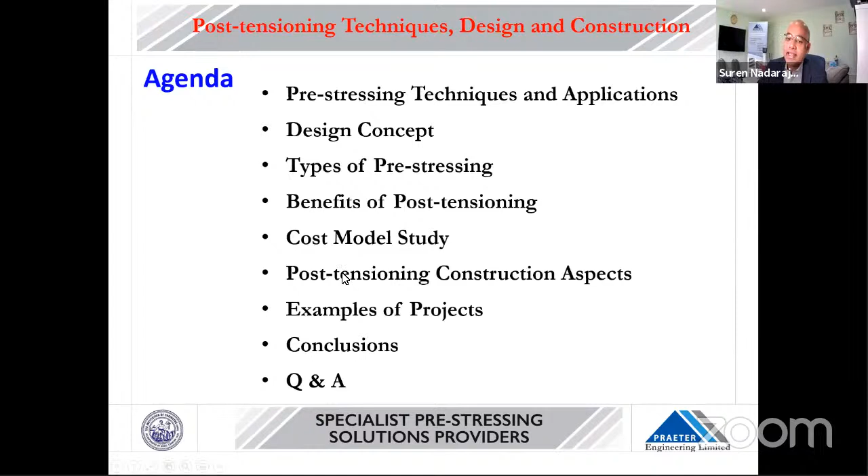The agenda for today is, first the techniques and applications, then a little bit of design concept. I would like to briefly touch on it, not really go into detail, and then types of pre-stressing. What are the benefits? We are going to mainly concentrate on post-tensioning, because that is the one used around the world. More than 80% of projects use post-tensioning. Then a little bit of a cost model study against the other available solutions, where post-tensioning stands. And then some of the construction aspects and the examples, and at the end the Q&A with the conclusion.

So the pre-stressing technology is actually a simple mechanism which we use in day-to-day activities, but we don't really realize that's what we are applying. When we are taking some books in the library, we press them together and carry them. This gives a pre-compression to the books, so that they stay intact next to each other, and then you are able to carry them.

Similarly, the standard cart wheels everywhere in our countries, like a horse cart, have a timber ring, and then a slightly smaller diameter steel ring. They heat up the steel ring, put it onto the wood and then suddenly cool it. This compresses all the spokes and the wheel. Then it has more capacity to run. It has a pre-compression.

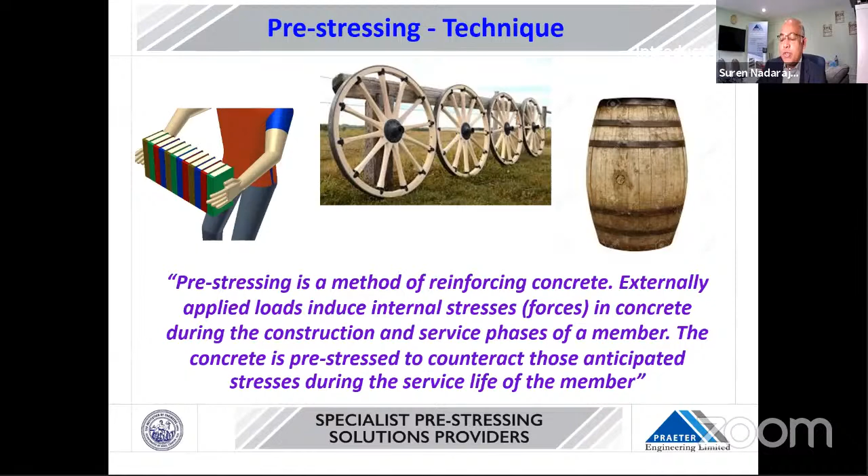So what we are doing is exactly like what we have done on the three above. We are giving additional pre-stress. Then the post-tension in that pre-stressing can come with another extra factor, which is an eccentricity. So you will have some kind of additional moment as well we can give it.

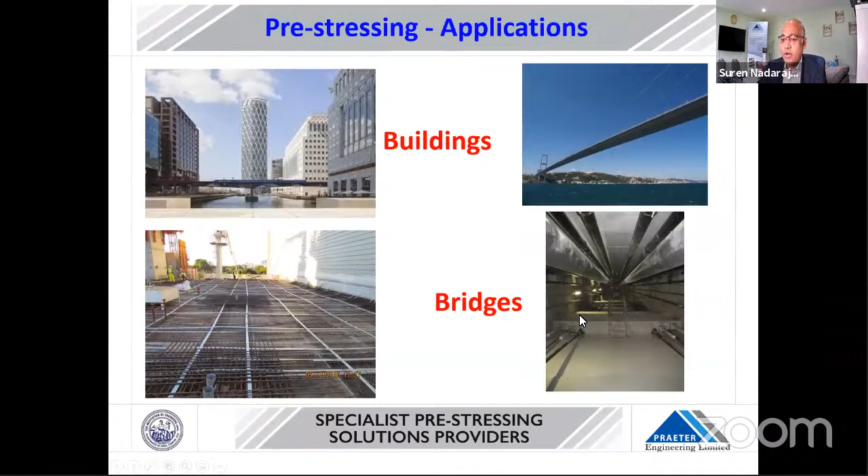So if we look at where we are using this pre-stressing effect, nowadays pre-stressing is used in many places: buildings, especially in Europe and Western nations; all the tall buildings are mostly done by pre-stressing technology. The reason is the height of the buildings is restricted due to airspace requirements, so there is a reason to reduce the slab thickness. It is traditionally used in bridges. It can be either internal or external. You can see it's a box girder inside.

It's used in tanks. In India, this is very, very popular in LNG tanks. Most of the LNG tanks are constructed using post-tensioning pre-stressing technology, because when the water is coming, it's pushing the loads outward, so we try to bring it back. So this is very popular. And another way of doing it is the pre-stressed tanks.

If you look at this LNG tank, it is very, very tall. The thicker wall you build in concrete in an in situ manner, about 3-4 meters at each cycle. It could be 20 meters, 30 meters tall with a diameter of 30 plus meters. But there are some other tanks, especially in the European nations, we need for vegetation, to keep the water inside certain tanks for farming during the winter times. And also the water treatment plants.

Here, our household water when it comes out, we can't straight away put it to the sea. So what we do is we try to recycle it, we try to sanitize it, and we get it into a few tanks. They are not high, less than 10 meters tall, but the diameter would be 50 or 60 meters. These are normally constructed with precast panels. You can see each panel has holes, pre-installed ducts, and then strands come in, then finally get tightened up.

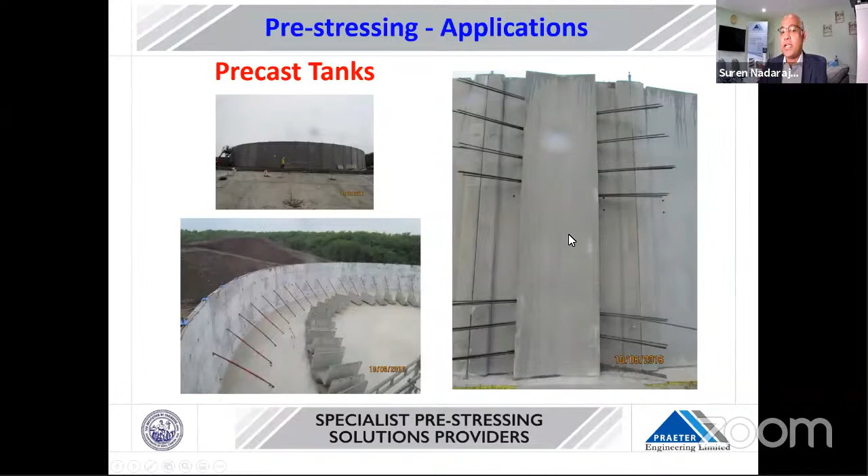Staircases, we do quite a lot, like freestanding staircases. This is a spiral staircase we completed very recently. All the treads are precast. Then we put it together through the strands. You can see that strand connecting all the way from bottom to top. The only support is at the top and the bottom, spiral in nature, very thin, very slim, and it looks very nice. This uses pre-stressing.

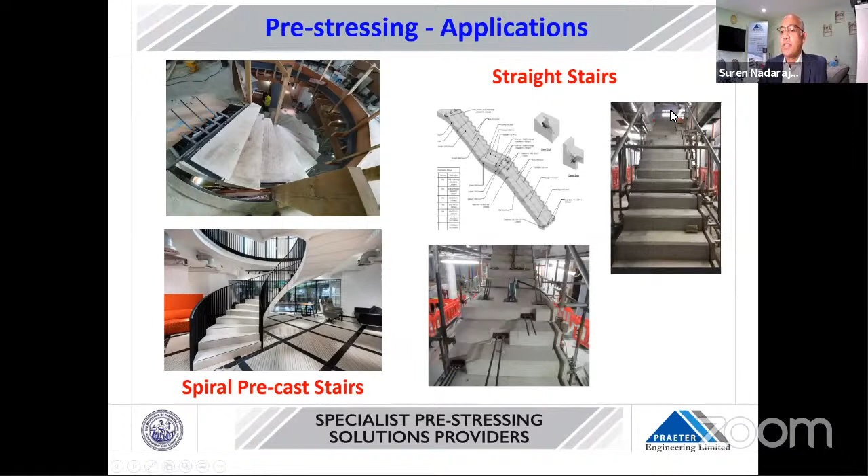Straight staircases: this is about a 15-meter long staircase from one place to the other, connected by pre-stressing technology. Then you can use it for heavy lifting operations. This is a lowering slab, one of the jobs we have done.

It's a top-down construction. From ground level, plunge columns are driven into the soil, then the superstructure is carried over. But what we have done is on the ground level, we cast two slabs on top of each other. Then the digging started, muck away and excavation done. Once the excavation is done and below is ready, we lower the slab into position. So it's a heavy lifting application.

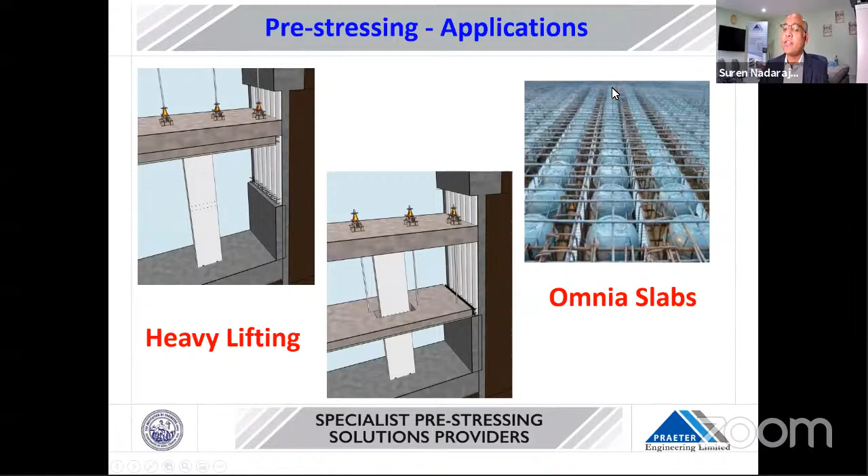Other places, bridge bearings: you can replace the bridge bearings by lifting off the female section or male section and then replacing the bearings. You can use the propping. At the bottom, you can see that the jacks are there. So this is the bridge construction.

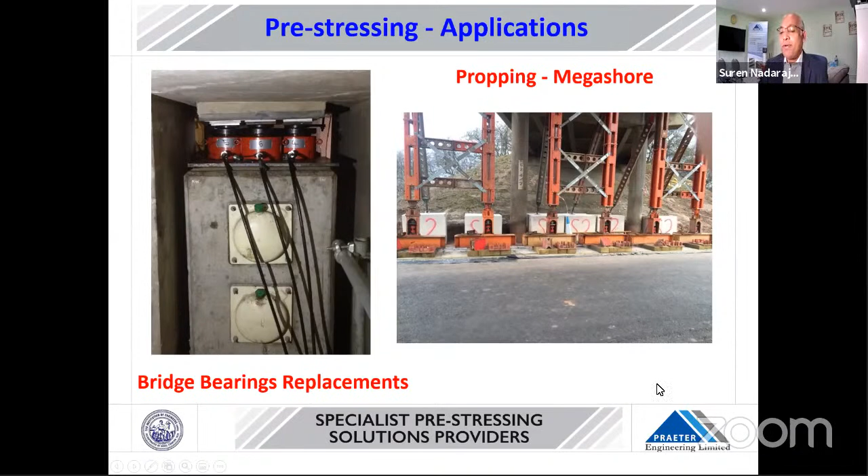So we need to lift off the bridge and then, underneath, the bearings and pads all need to be replaced. You can also apply this pre-stressing force in temporary work structures. Tower crane ties: you can use these for the tower cranes or the basement.

Here, if you have, say, a 220-meter tall building, for the tower cranes wind is an issue. So you need to tie about every 5-6 levels to the slab. For that tying, we use pre-stressing technology to hold it. Or we can use torquing; sometimes we may not be able to stress it, so using the nuts we just lock it, basically by providing torque. This is indirectly giving a pre-compression.

Bar stressing: recently we did one such job. When you build a large core, the foundation should have a minimum weight to hold the building and resist the wind. But at the time of construction, you may not have that weight, so the foundation may float. To avoid that, we tie bars from the foundation and put an extra force onto them. Once the top structure is done, you remove that force.

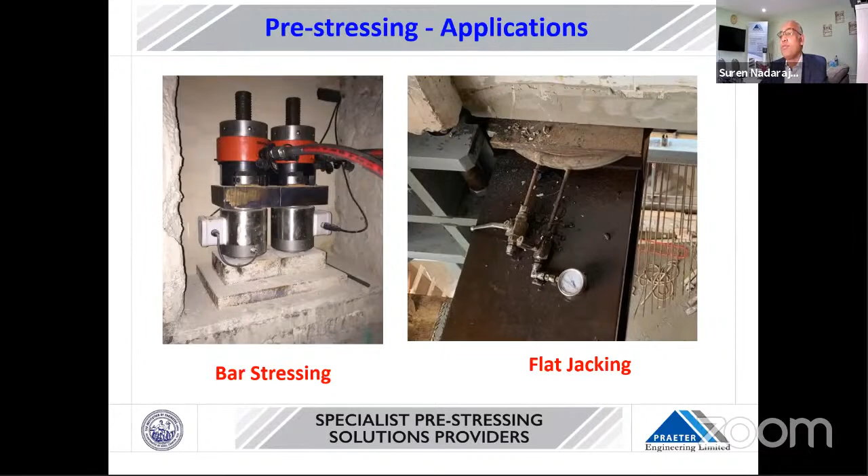Flat jacking, you can use this in many places. If you want to replace a roof, like a steel roof in a stadium, you can just use this flat jack. This is a very slim jack, less than 50 millimeters or 100 millimeters max thick. You can raise it up, remove the element, and then replace it. So flat jacking is used in many circumstances.

Now I would like to quickly touch on the principle. When a load comes onto a structure, tension is produced. This is the standard behavior. When tension is produced, cracking happens at the bottom. In reinforced concrete we resist that by providing reinforcement at the bottom so that cracking or deflection can be controlled. So in a reinforced structure, cracking is resisted in tension; we are adding extra tension capacity through the reinforcement.

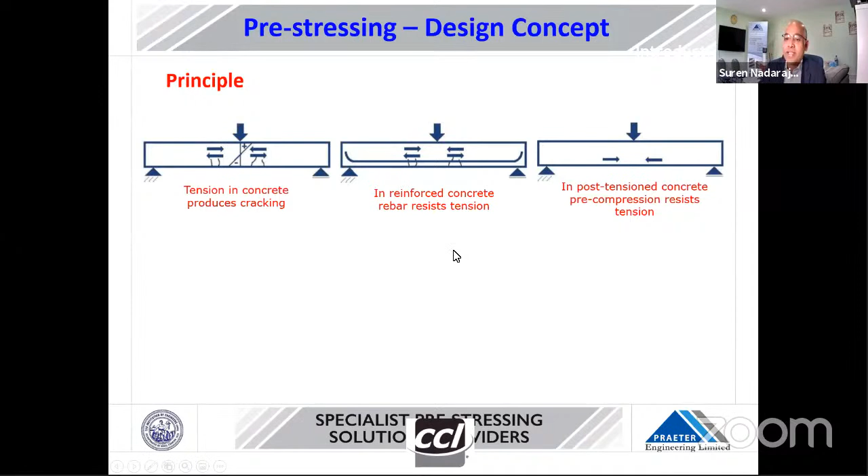However, in pre-stressing, we apply a pre-compression so that the concrete tension, cracking or deflection is resisted by the pre-compression of the PT. Technically, both are the same in resisting cracks, but the way they resist is slightly different: one is in tension, one is in pre-compression. So with pre-stressing, at mid-span where you normally get deflection or cracking at the bottom, we are pushing upwards to reduce the crack width or the deflection.

When you lift it off, you need to distribute that moment or load somewhere. So we bring that load onto the column location and dump it onto the column. In natural behavior, it will deflect here, and very minimal moment will be transferred onto the column; whatever it can take, it will take. But with pre-stressing, we are lifting it off, distributing the moment onto the supports and giving more load to the column. This is exactly what we are doing.

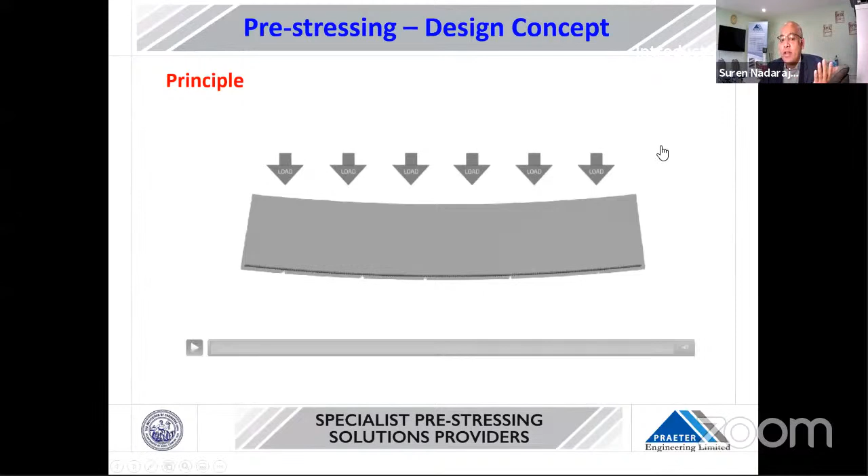Now, I just wanted to have a look at this one. This is exactly what happens when the load comes. Now, with pre-compression, pre-stressing applies a force so that we give a reverse moment. So it deflects upwards, then the loads come in, and it ends up almost flat.

So at the early stage, we try to balance a certain load of the structure by applying a reverse moment onto it. This is basically what we call load balancing. Normally, we decide how much load we want to balance.

Say it is a car park; normally you will have very long spans, like here, 15.6 meters in one direction and 7.5 meters in the other, so you can park 3 cars on one side, a driveway, and another 3 cars. That's why grids are almost identical for all car parks. For 15.6 meters the self-weight would be quite substantial, so we will balance the self-weight. In some cases, say an office building, you always have your desks, books and certain things.

So you will balance it more than the self-weight. Some load from the live load, you will balance it. So that's the amount of pre-compression is decided by how much balancing you wanted to do.

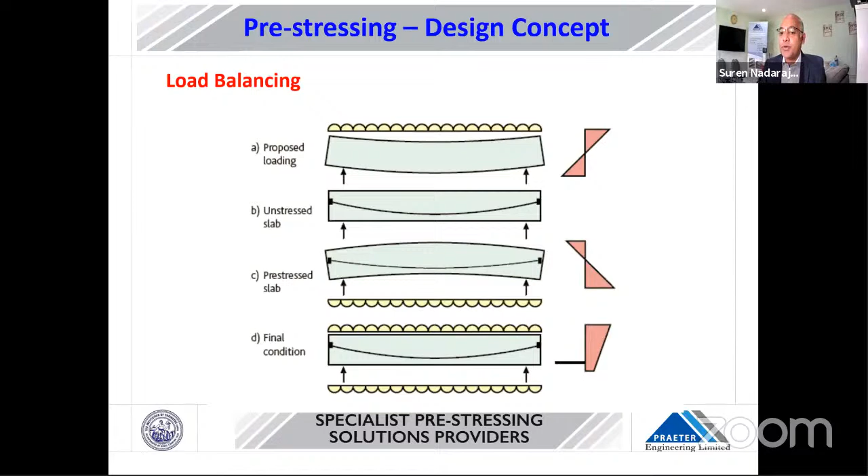This diagram just gives you an idea. Purely on the technical term, this diagram shows where the compression and tension is happening. On the top, a compression moment is induced, at the bottom a tension moment is induced. By providing the PT pre-stressing, we are giving some pre-compression, as well as, because of the eccentricity, some moment. So the resultant effect is this much. If you compare this against that, we are totally taking away a certain kind of tension. So this is the principle we are using.

Now, if you look at pre-stressing, there are certain things we need to consider while designing the floor layout. It could be many different layouts. This is some of the 3 layouts I have chosen, which we recently completed in London.

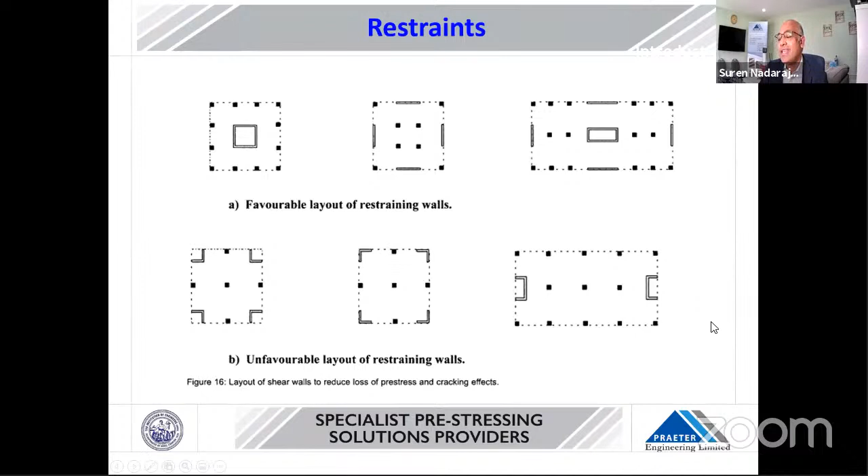However, the last three layouts may not be favorable because these are too stiff. In this area of the slab, these two cores don't allow it to move. So what will happen is, if we put the PT here without a proper assessment or provision, it may crack. Similarly, this layout between here and there, all of that - this restraint needs to be carefully looked at.

How we are overcoming this restraint is either you can produce a pour strip, which is an infill strip. You wouldn't cast this at the time of construction of the slab, so this slab can, when you stress it, move towards the stiff core. We can technically calculate based on the time distribution, like a load history approach - say 30 days how much it will shorten, 60 days how much it shortened - so we can decide when to lock this area.

Similarly, nowadays we use a lockable dowel, which is a shear dowel, but inside it's like a male-female connector. It can move freely until you lock it, until you grout this area. This allows us to not need any supports underneath, so you can continue your construction. Whereas if you have a pour strip, you need to have a table, you need to keep that support underneath. So there are ways to overcome this shortening issue, and it needs to be taken into account while designing this.

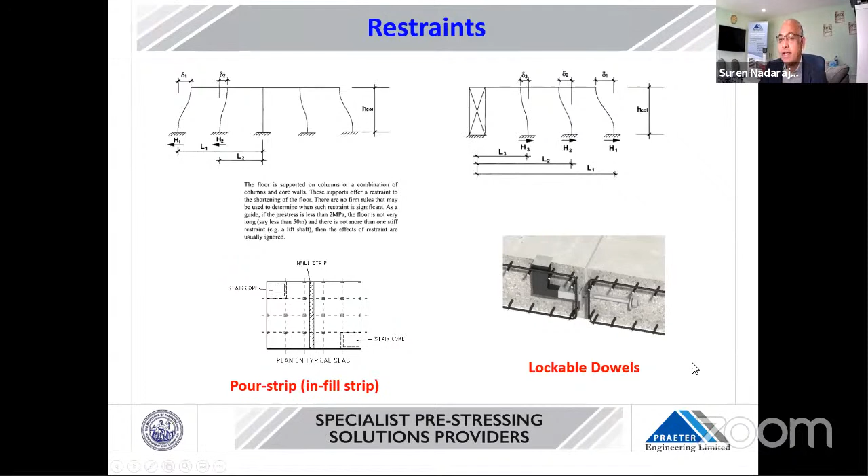One other thing is the robustness and progressive collapse. This is something very, very important. I'm not much familiar with Indian standards, but I'm pretty sure it should be there in a similar way. So it allows the slab to tie

between the supports, so that against progressive collapse, unless you design it as a key element, the slabs should be able to resist a certain amount of force. This should allow people to escape when a floor has failed. Before the lowest floors totally fail, the people underneath should be able to escape. This is something irrespective of whether you are doing post-tensioning or RC - this is something we need

to do. The reason I put this slide is I have been on a few big projects in India, but they never did a check for this. So I felt this is something Indian code probably deals with slightly differently, but our British Standard or Eurocode very explicitly gives you guidance on how you need to do it.

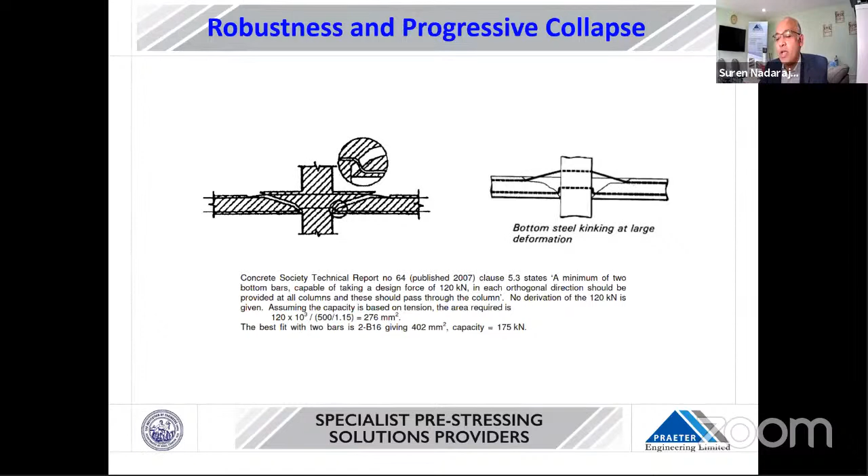It gives us - the purpose is, if you can see, before this phase, most of the time failures happen at the connection. You all know that you don't really see failure happen because of just cracking or something in the middle. Most of the time it happens at the connection area where you are connecting with the columns or walls. So that's where we need to tie it.

So there are processes given. You need to go for edge connection, horizontal ties, peripheral ties, and internal ties - you need to do it. So this is something, again, design needs to take into account. I'll just park that on the design part.

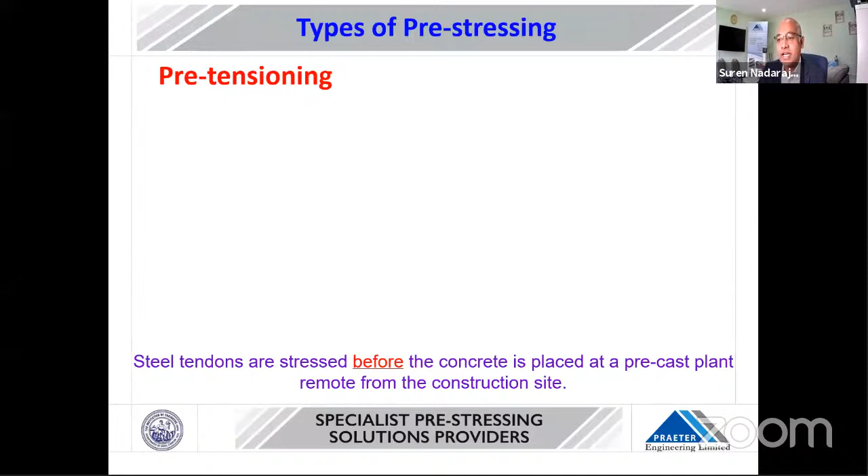Now, quickly, I move on to the type of pre-stressing. There are two types of pre-stressing: one is pre-tensioning, the other is post-tensioning. By the name itself, you can understand the first type - it says you need to tension before you cast that concrete. So what happens is...

this is in precast factories. You will see this mainly in bridge segments, precast bridge segments. They will have a strong stressing bed, and there will be buttresses, and a jack would be there. The strand would be stressed, and then concrete would be cast. Once you cut, you just cut at these two areas. Once you cut, that pre-compression causes the strand to try to pull together, so this middle beam will hog up to take that load. At the end, it has to be in equilibrium, so applied load and resisting load get hooked up.

Hollow core slabs - I think in India they use a lot of these. The hollow core slab uses exactly the same technology, which is called pre-tensioning.

On post-tensioning, by name, what we do is install all the tendons - we call them tendons or strands - and then cast the concrete. After you cast the concrete, then you tension it. When you tension, this is where we get the parabolic curvatures, or this depends on the load we need to provide.

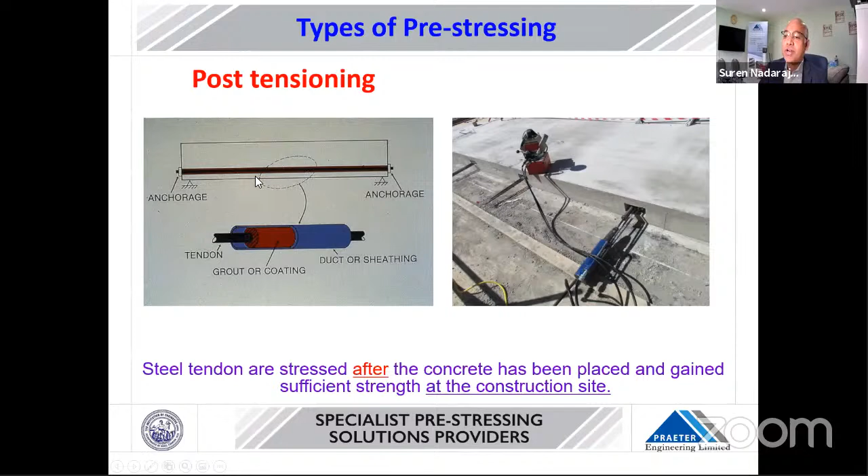It is applied at site level. It's an in-situ element. So it will have a strand, then a grout, and then you can have a duct, or you may have just a strand with grease and sheathing.

So you can see that pre-stressing has two types: pre-tensioning and post-tensioning. Again, post-tensioning has two systems - one is called unbonded, the other one is called bonded.

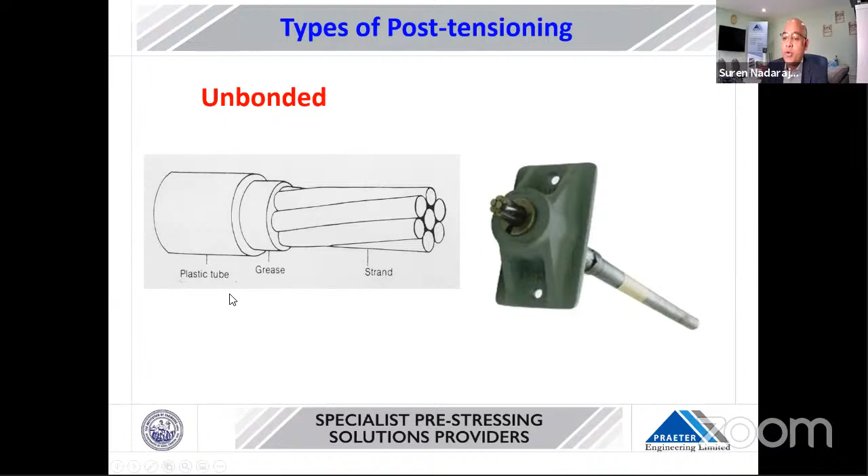Unbonded means we don't really grout that tube inside. It's a strand, its purpose is the pre-compression would be given at the two ends of the slab or beam or whatever the element. So it will have a tube with grease inside, strand will be inside. When you stress it, the anchors are at the end of the two slabs. In the middle, it can have a parabolic nature or whatever is required, so based on that force, it will be pulling up.

So the significant difference between the two is, if you look at a bonded tendon, since the strands are connected through the grout, duct, and the concrete, the load is transferred wherever it touches. The pre-compression is transferred wherever it touches. So if there's accidental damage, it's very localized - it's not going to be able to pull through anything.

Whereas with unbonded, if you cut somewhere, because it didn't hold it anywhere in between the slab, it will fly through to the edge. That's why when you look at unbonded, at the two ends there will be a safety cover to avoid a flying end. Also, with bonded, we need grouting, but unbonded doesn't need grout.

And each one has different reasons to use it. Unbonded has lower friction, so if you have a very low load but want a larger span, you may use unbonded, because you can lay it one by one as a reinforcement. Whereas if you have a very heavily loaded area, you need concentrated load through ducts, so you will use bonded.

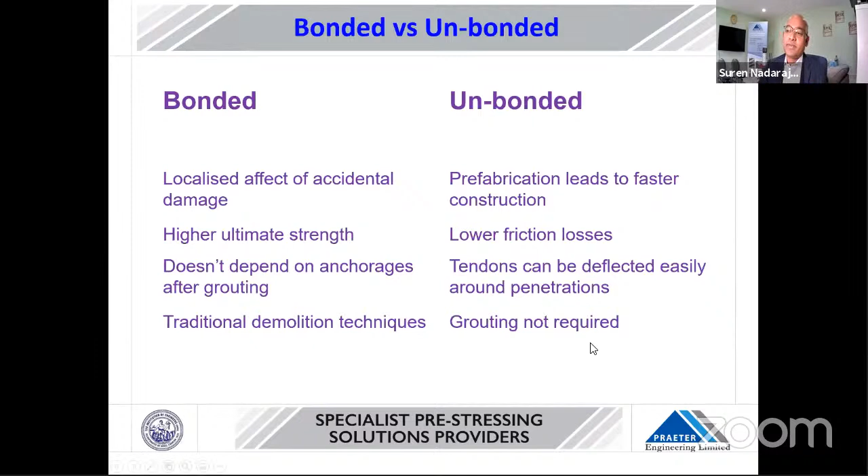So I try to concentrate on post-tensioning bonded as the most common type.

Long spans, like lecture theaters - you don't want small areas, you want large areas, like temples. If you look at our temples, this is exactly the kind of solution our kings used previously. If you go to all the temples in Trichy, it's amazing the technology they used at that time - punching shear resistance, how they achieved it, is fantastic. Nowadays we can't do that kind of work, so we just try to use minimum concrete, minimum expenditure. That's where you use post-tensioning, and constructability is quick because very little reinforcement is needed.

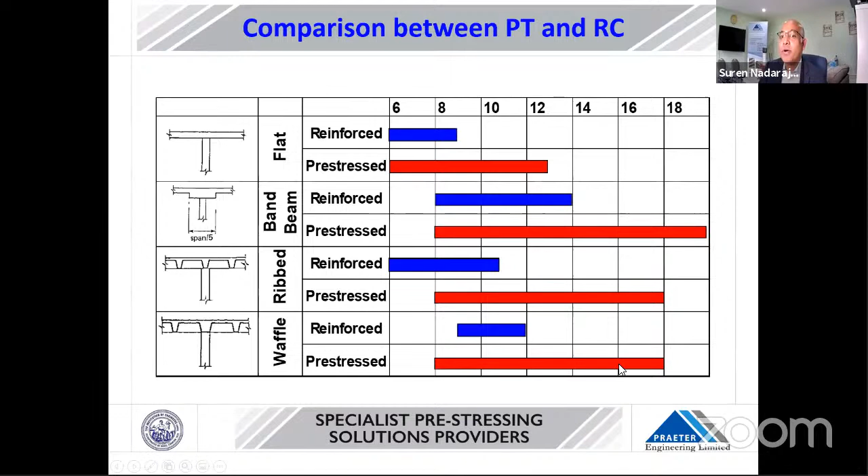And if you look at the waffle slab, one of the interesting things is that the reinforced slab straight away goes to 9 plus meters. We don't use waffle slabs for anything lower than that. But with pre-stressing, you can use it. You can thin down the element and use it. So there is a significant benefit from converting RC into PT.

On the program, normally here in the UK, if it's RC, we go with about a 7-day cycle. But by doing post-tensioning, we can save 2 days, so 5 days a cycle. Say we have a 60-story tower: if we turn the cycle from 7 days to 5 days, we are saving 120 days, which is a phenomenal benefit here in the UK. The earlier you sell the property, you get that money back and interest, so that's a huge saving. So the program is substantially saved.

You can easily save 15% of the program, but there are chances you can do even 20% or 20+%. Then I'll just quickly touch on the cost model study. This will give you an idea of how post-tensioning or pre-stressing should be applied.

When we say pre-stressing, there are benefits, but it doesn't mean you can apply it everywhere. You have to really analyze where it gives you the most benefit. You simply should not say anything can be done with post-tensioning. A proper analysis needs to be done.

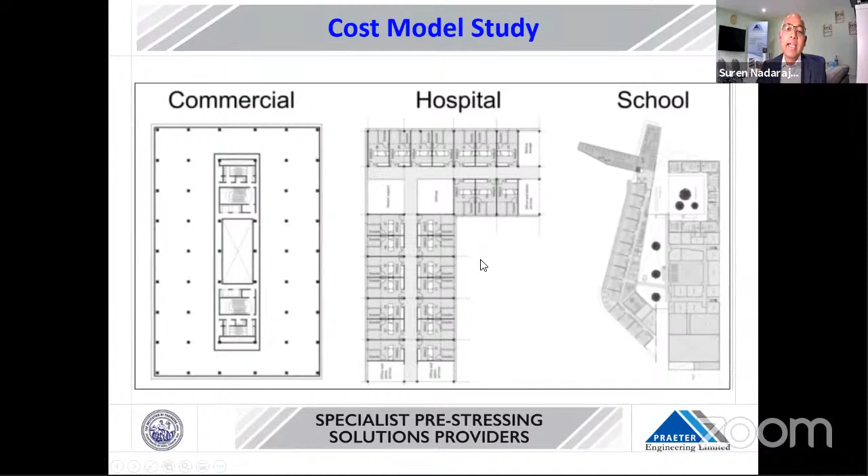Say commercial property: the Concrete Society took and studied this, and published a document on a typical commercial property with shops, a hospital building, which is a ward, not the operating theaters, because those are very particular areas with scanners which are very heavily loaded, and also schools. So when we do that, you can see the three options used.

One is the RC flat slab. The other one is a post-tensioned flat slab. Then the other one is a composite section, steel with concrete. So if you look at a school, the most beneficial is the PT flat slab. But the composite slab is better than the traditional RC slab in a school.

The reason is, when we say school, you know that we need to have a corridor for the children to run away, and they have to have a classroom which normally occupies 30 to 40 kids. So there is a minimum spacing there. So what's happening is there's a large end span with a small span at the corridor. And then when you look at it along the building, you will have that repeat everywhere.

So that scenario, that condition is almost similar. You don't have a shear wall or core. So that all should be resisted by the brace, by the columns actually. So when you have columns, that's why you can't go too tall with the school building. Generally, you will have maximum 2 floors. So that's why the RC structure is expensive compared to the other.

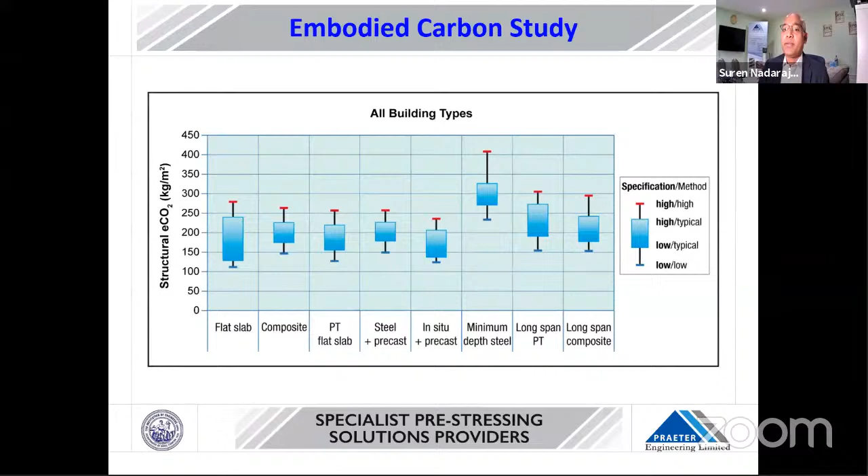This is the first part done. Now, quickly, I would like to move on to the construction side. Then after this, I will have a project. I think we are probably on time. So there are 4 stages we need to look at. One is installation, stressing, grouting, and then sequence. It is a process-driven approach, so I just wanted to go onto it.

On the installation, you need to follow certain sequencing. As I mentioned, this is a process-driven solution. So you need to really follow this. You cannot do a duct before the tube or after the tube or anything. You can't do this operation before completing one of the lower operations. So it's very much process driven. That's why this is called a specialist industry, like steel structure, pre-stressing, because it has a process-driven approach.

First thing, you need to make sure that the deck is safely erected, and especially the areas around the column, say when you have a circular column, you may have to have special formwork underneath. So you need to be very careful before people get onto the deck.

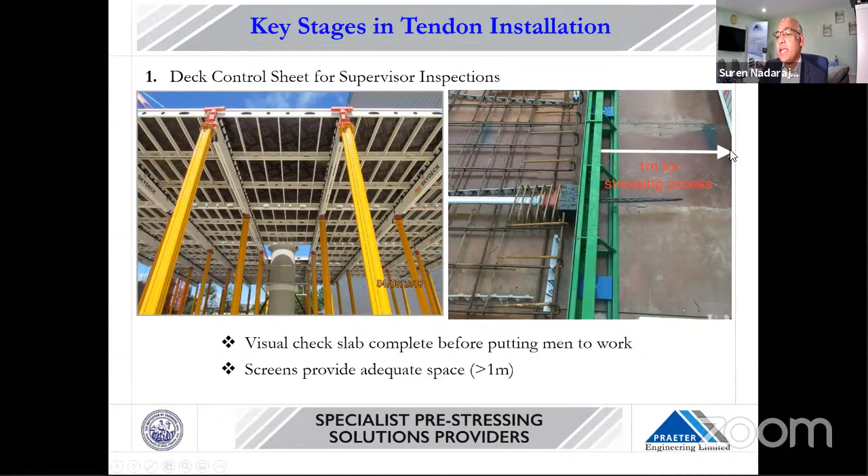Just need to make sure the formwork is done properly. For the stressing purposes, you need a space to stress at the end, so you need to have a deck for about 1 meter. Then the first operation, once the deck is ready, on a post-tensioning operation is similar to reinforcement. What you normally do is, deck is ready, you bring the reinforcement based on the drawing and install it. Similarly here, we need to install the tendons or strands.

The strands will come in a coil, it's about 3.5 tons, so appropriate safety measures need to be given. Lift it off to the deck. You can see that we are lifting using the rope, not by the chain. You should not lift these things by chain, because if you do, you will damage the strands at the corners. It goes into a dispenser, with all the strands safely tied down. Then once it goes into the dispenser, you will remove it.

And now, because of 3.5 tons, where you are going to keep it on the deck has to be carefully thought through. The location of that 3.5 tons on the formwork is very crucial. You need to find, say, a location closer to the columns, and then underneath the formwork you need to strengthen that area to take that 3.5 tons load. So you need to be careful here.

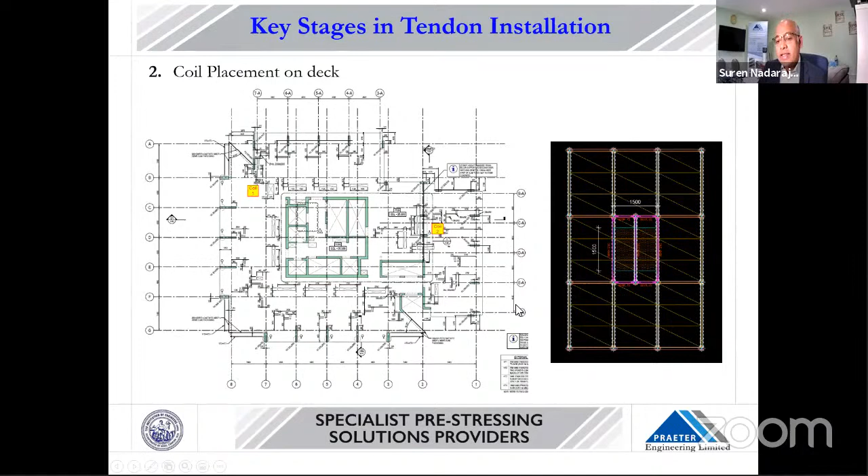Then the next stage, after the strands are done, you need to use the components. I believe in India you don't have a requirement to use an ETA, European Technical Assessment, approved product; it's not necessary. But in Europe and the UK, we must use one of the ETA approved products. This goes through rigorous testing.

One of the important tests is 2 million cycles of vibration. Basically it's cyclic testing. It's connected to the jack, and 2 million cycles are applied as if the slab is moved, meaning people are coming and going, deflecting and not deflecting. It should withstand 2 million cycles. So here we need to use those components approved by them.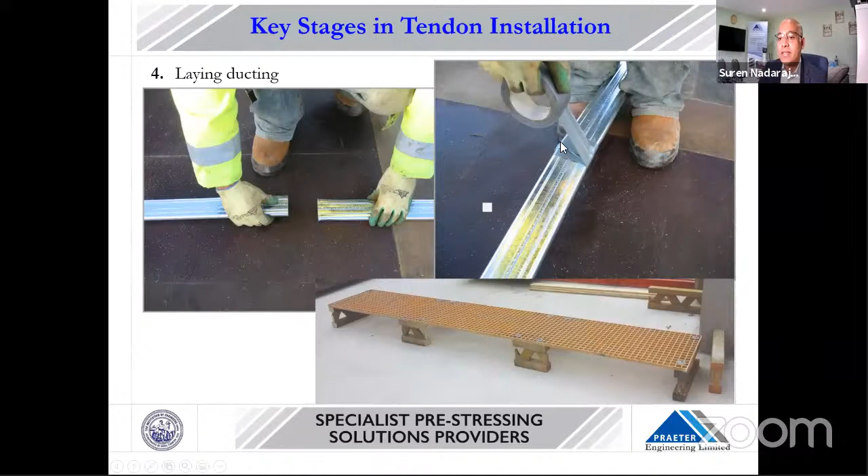Then after installing the anchors, you install the duct, connect the duct and make sure that no leak is going into it. Then you cut it at the appropriate size. The next stage is to install the strands. The strands can be installed by mechanical means, there's a small device so that it's pulled in. If it's a long tendon, you can drive it through a machine. On the other side, someone needs to be there to make sure enough length has come out, and he needs to say stop. Communication is very, very important. If not, it may shoot out longer than needed.

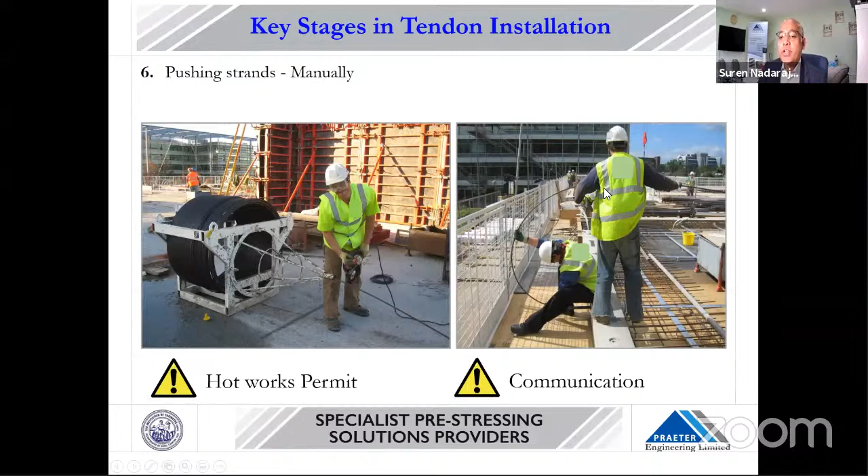The other option is manual inserting. You can install manually where you have a small length, like 10 meters or something. With a machine it's very difficult; it quickly comes out 10 meters, the acceleration is more. So you use a manual methodology to install.

Once we install the strand, at the end of the day we are going to apply a force. On one side we apply a force, and the other side we cast into the concrete. The amount of force we apply varies from about 180 to 220 kilonewtons, which means 18 to 22 tons. In layman's terms, it's like the weight of 20 BMW 7 Series cars stacked up; that's the amount of weight we are applying onto each strand.

So if you don't anchor this dead end sufficiently into the concrete, when you apply the force, the strand may pull out.

But if you want to take that bond stress of the concrete to the steel, then you need 3 to 4 meter long strands to be installed, to be connected by the concrete. If you do, you are basically 3 to 4 meters ineffective zone. So to avoid that, a bulb is created at the back. This will take about 60 to 70% of the stressing load just by this bulb. So the remaining about 700 millimeters to 1 meter is enough, we can live with it.

That's the reason you can see that you have the reinforcement to cover that area. So this is the bulb and dead end they make. Then once they're done, they will install the live end. This is the live end where we are going to stress it. This is the anchor. There's a pocket so that we can cover it. So at the end of the operation, you don't see anything outside the duct. And this is the dead end.

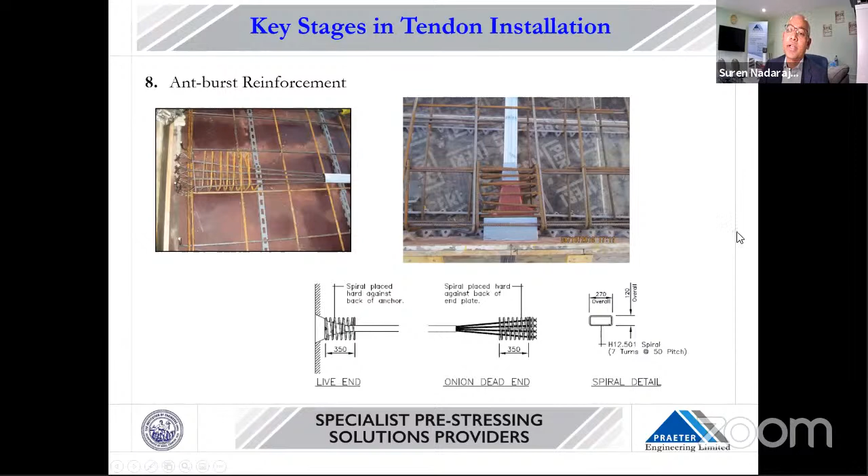Now, when you apply the force, a concentrated force is applied at the surface. So to avoid the bursting effect, we need to have closed links. A spiral link is provided so that the applied concentrated force can be distributed within the concrete so that no failure happens. So this is very important to install.

Then once you have done the anchor, duct and the dead end bulb, you need to provide the chairs to get the profile. Based on the design, you can have different parabolic curvatures, depending on your moment. So we are providing the tendon force directly opposite to the bending moment. So you need to adjust the tendon to the required height based on the drawings or design. You can use a plastic chair or a metallic chair. Either way you can use it.

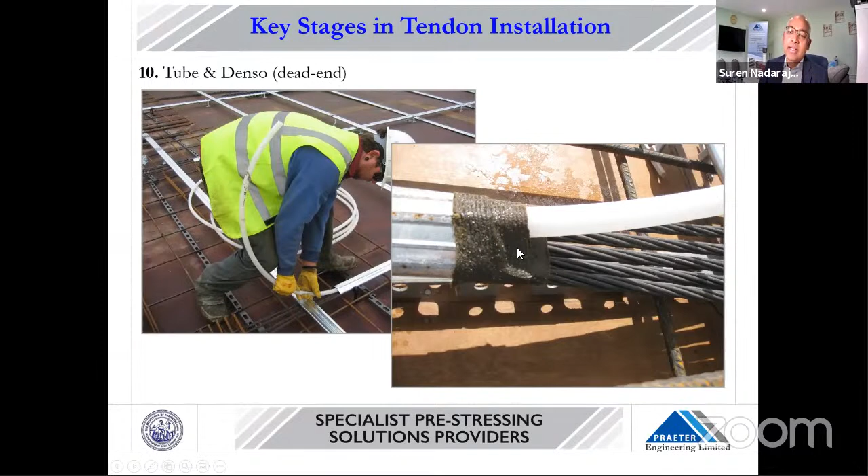Once you've done that, at the end of our stressing operation, we need to grout it. So we need to have the grout tube connected. And this is a sticky tape, gaffer tape, a denso tape, which will not allow any water or slurry from the concrete to go into it, so that the duct can be free of space. Then the same thing at the live end. You will see the tube. So live end and dead end, you will have the tube. So when you grout from one side to the other, the grout will flow through and fill in.

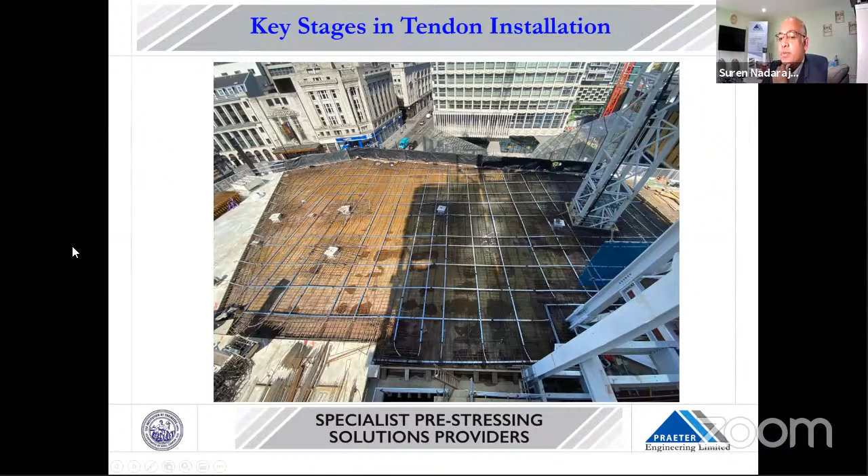These are some of the photos once completed. You can see that this is about 1,000 square meter area with tendons already installed. There's a bottom mesh we will have. Until about 10 years ago, we didn't provide a bottom mesh. The pre-compression by the tendon is more than enough. But Eurocode came up and suggested that for anti-crack and fire reasons, we need to accommodate a few methodologies. So one of the easiest options is providing a bottom mesh. So in the UK, almost all slabs will have a minimum of 6 millimeter or 8 millimeter mesh at the bottom.

Then this is another one. Here you can see another area. This is a good photo. At the two columns, you have heavy reinforcement on top of the column for punching shear resistance, with the shear studs. And the tower crane is going through the slab. So we have accommodated this slab with the tower crane opening, which is quite big, about 1.5 to 1.8 by 1.8 meter. So we install a couple of bars all around. Then once the tower crane is down, it will be connected and cast back. And here you can see the parabolic tendon profiles very clearly on this deck.

So this is another one. You can see that this area is totally open. The reason is this is designed as a soft spot. When we say soft spot, initially it would all be cast as concrete, as slab. Then when an owner needs it, he can make this an opening. The provision is provided. That's why you can see there is reinforcement at the perimeter, just creating an opening.

It could be for the purpose of a staircase to come in. If this is actually a shopping center, this particular one is a shopping center, there's a possibility that 2 floors, 2 units, the same retailer can buy it. If he buys it, he would say, I want to have that staircase or the additional elevator to come in. So we accommodate this one.

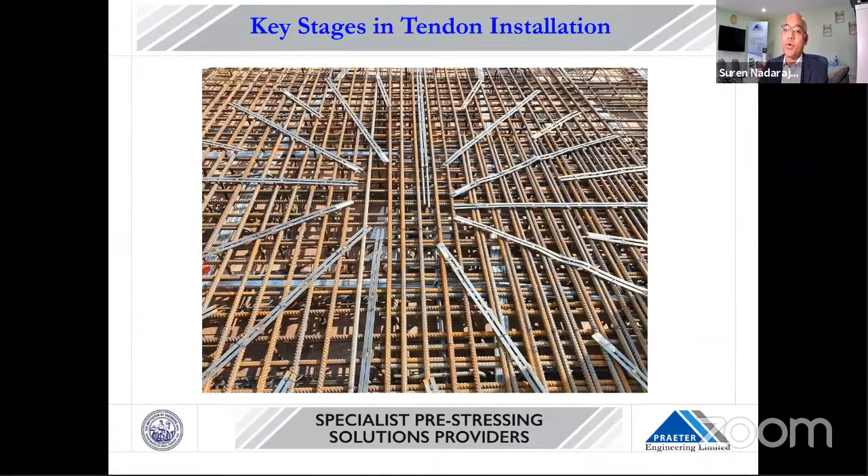So we use studs, which have a headed bar on top and bottom. That headed bar creates that holding force, and then the tension is created in the middle. You can see it's straight. This much on site would be installed in 15 minutes, 1 column. Whereas if you do shear links for this particular case, it will take about 3 hours to install by 1 person. So this time saving offsets the cost of the shear stud. Shear studs are expensive, but the time saving is very, very beneficial.

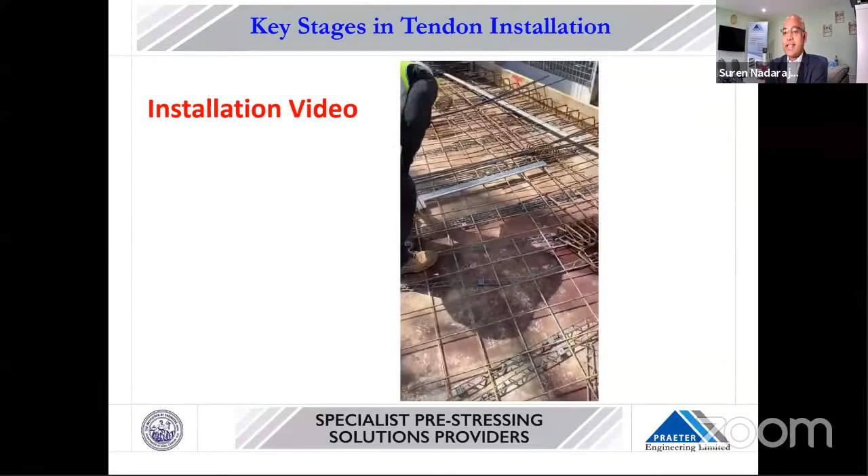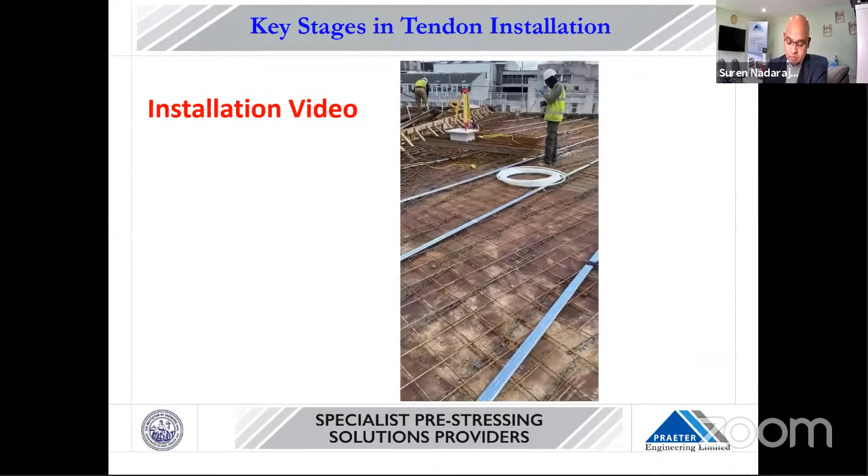This is the realistic site nature. Bursting links. They are cutting the duct. If you look at it, the ducts are laid over there. Bursting links are there. Some of the ducts are already installed with the strands. This is a top mesh. So this is how the installation will go.

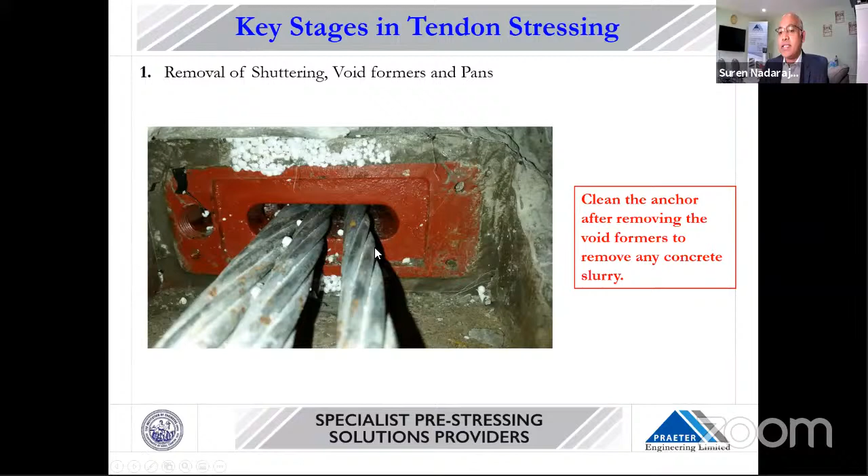Once the installation is completed, the next stage would be stressing. Once you cast, you just clear off the pocket, and this is how you will see it. Then you connect the block and the wedges. This is the conical shape wedge, which will allow you, once you pull and then release it, to lock in. Because we need to make sure that our theoretical force is transferred on site.

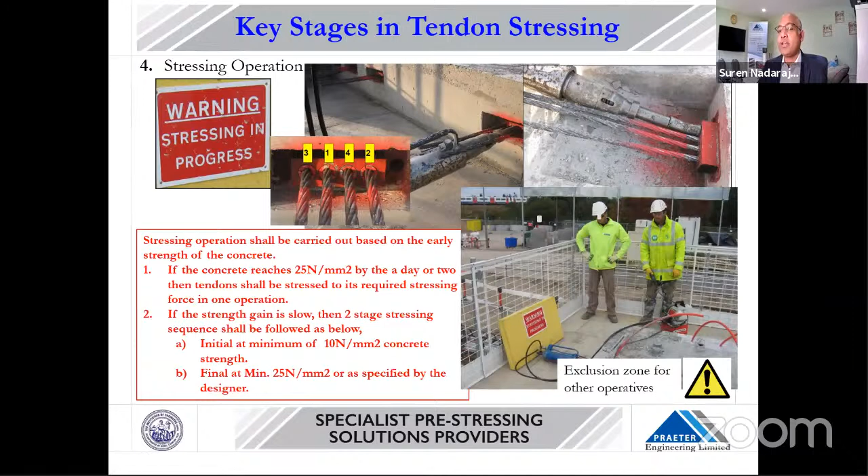The designer needs to know whether the force is applied onto the strand. What we normally do is measure: we know theoretically how much the strand needs to come out when you put in the 220 kilonewton. So they paint it, and once they stress, it will come out, and they measure that distance and tell the designer, and he will check against his theoretical value. If that is within a range of plus or minus 6% or 5%, he would be satisfied. His design force is already applied in the structure, so that structure can take that load.

So this is how it will look after you stress the tendons. These are the extensions. Then you cut it to make sure you have sufficient cover so that there's no water ingress and the fire rating is not affected. You will leave at least 25 millimeter cover and cut it, then use sand cement paste to wrap it up. Once done, the stressing operation is completed.

Once the stressing operation is completed, you can remove the formwork, you can totally go out. However, you may need to cast the top level. When you cast the top level, load would be going onto this deck.

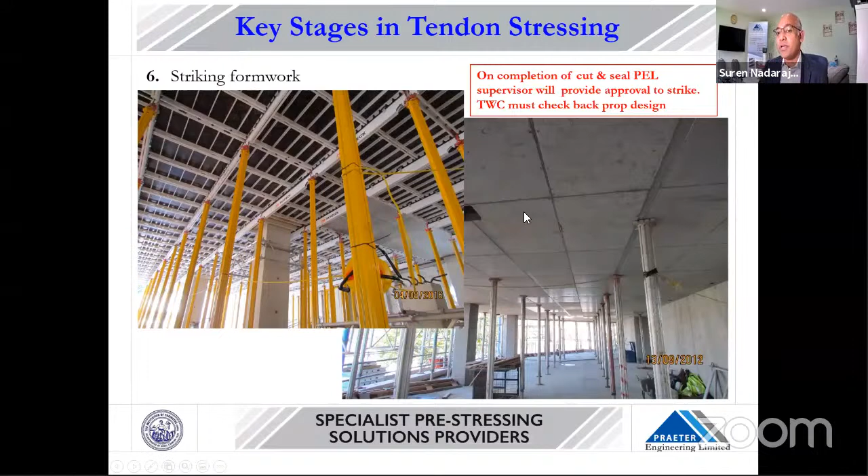So you need to back prop it. This back propping design is normally done by the temporary works designer. All these jacking operations require calibration. In the UK, we recalibrate every 6 months, so one calibration is only valid for 6 months, ensuring you're not missing any parts or experiencing issues like oil leaks.

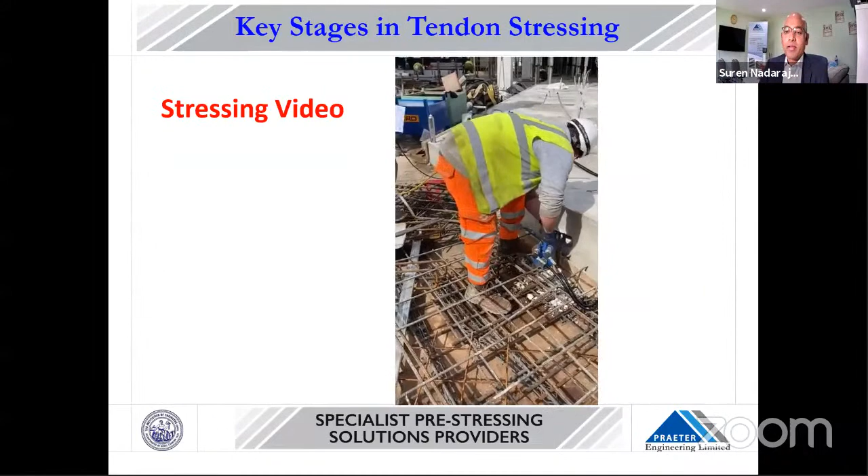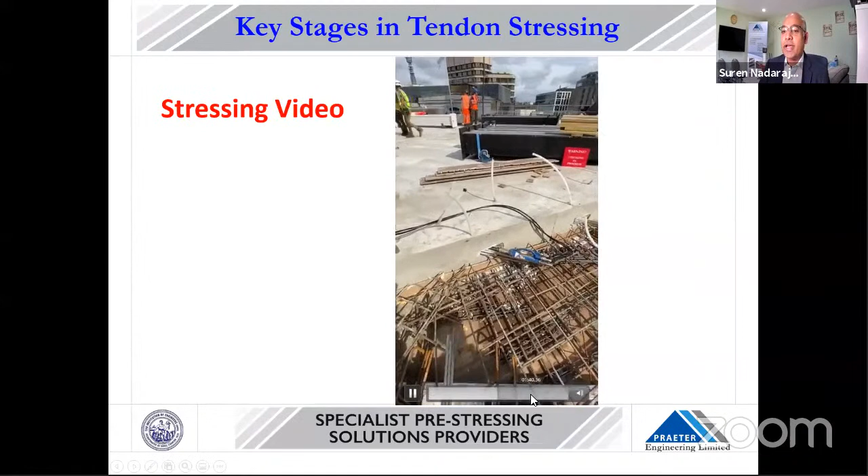I'll show a quick stressing video. This is the guard, that's the jack. You can see they continue the operation, and then they release the stressing. So the stressing operation is done.

Once done, then we move on. Since it's a bonded tendon, grouting needs to be done. Before grouting, the supervisor checks everywhere to see if the tubes are damaged. If damaged, he will repair it with a connector.

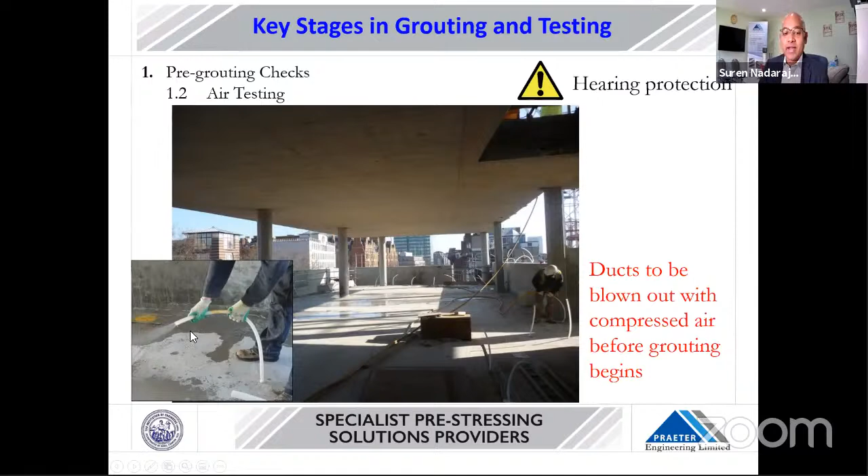Then they send high pressured air from one vent to the other, so that any trapped water or debris can come out. You can see it all coming out, confirming it's clear of any debris.

Then the grouting is prepared in a grout pump. In the UK, we use pre-bagged grout, which has all additives added in the factory. It comes in 20 kg bags, and we add 10 of them into 70 liters of water, mix for 4 minutes, and then pump it. That's all we do.

But I think in India you have cement and additives separate, and there's a chance you may miss that amount, so the grout may not set at all. Grouting is very important. If your water content is too high, the grout may never set, because of the nature of the additive. That's a very dangerous situation, so we need to make sure grouting is done properly.

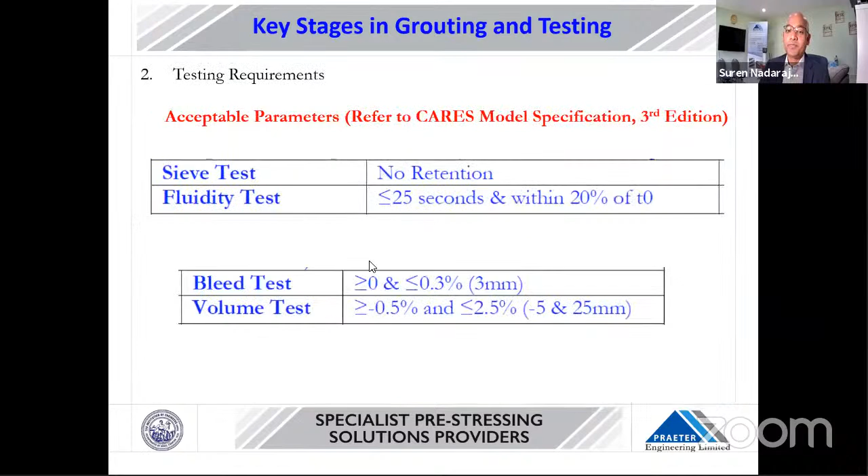There are some tests that need to be done to understand if the grout is suitable for grouting. There are parameters that need to comply. As I said, 10 of these bags are added and mixed, and once mixed, they first do a test.

It's called the sieve test. The intention of this sieve test is to check if there are any solid particles. When they pour it, there shouldn't be any solid particles remaining on the sieve. This sieve is Eurocode certified, with a square mesh of a particular size, defined as 0.5 millimeters square. This is the sieve test to ensure no debris or solid particles.

The other one is the fluidity test. This checks the fluid nature of the grout - it can easily flow through but will still set. Normally it's about 12 to 20 seconds, and we typically get about 15 seconds.

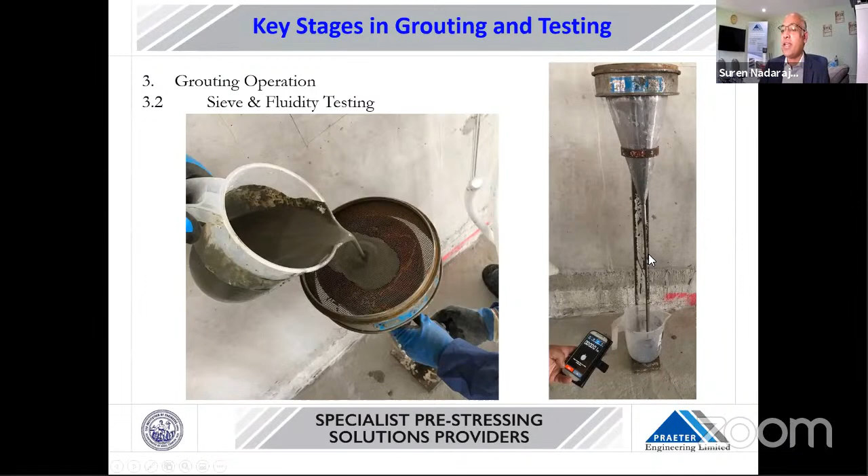Then there's another check we call the wick test. This measures how much bleed material occurs between the strands. But it's not really a relevant test for us, because you only measure that bleed 2 days later, but by that time the grout is already there, so it may not be relevant.

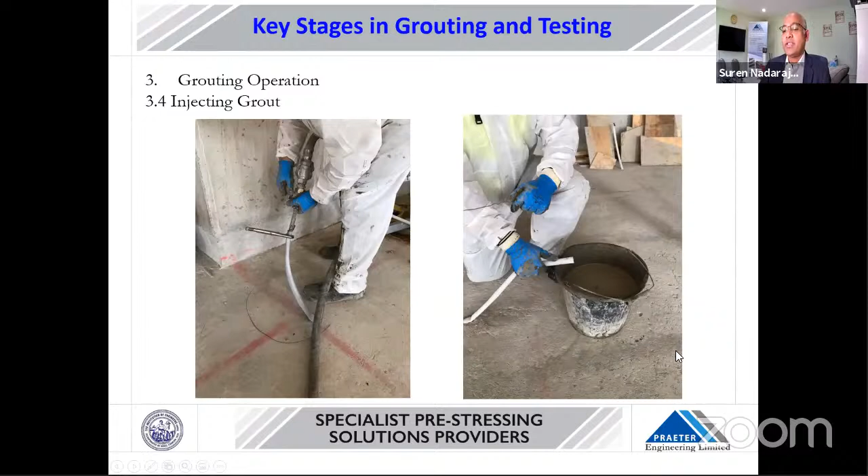This is how the grouting operation happens. From one end it is started, and at the other end, the guy waits to see it come out. When you pressurize the grout, he sees it come out. Normally about 4 to 5 liters we don't use - we waste it because it may contain water. Once about 4 to 5 liters comes through, he closes the tap and leaves it.

The next day when he comes back, he can check it - the grout is already done. At that point, the entire pre-stressing operation is completed.

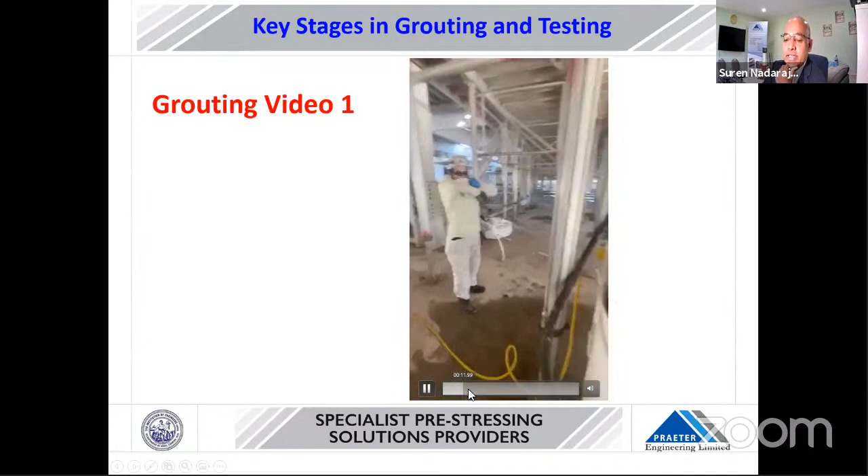Just a quick video briefly. This is the grouting pump. He's putting in the time and they are mixing. They're doing testing and setting up equipment on site.

Yeah, this is what they do. Here's another video of the grouting operation. You can see that they ensure the same tendon is being grouted, and you can see it pumping under pressure.

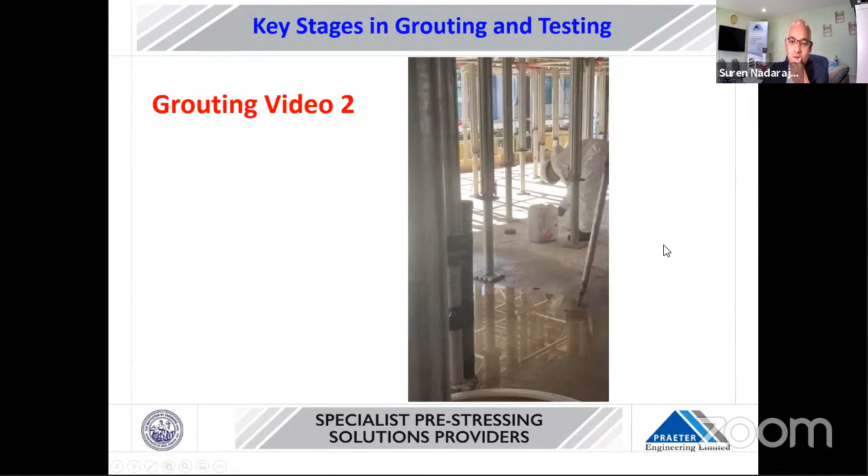You will keep some pressure even after closing, just to ensure it's pressurized and everywhere is filled in. Okay, so now that's the full operation finished on the grouting, that's all done.

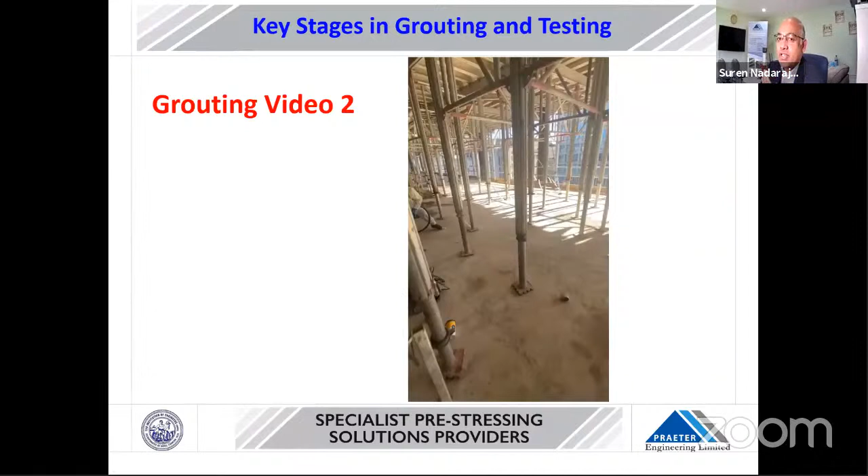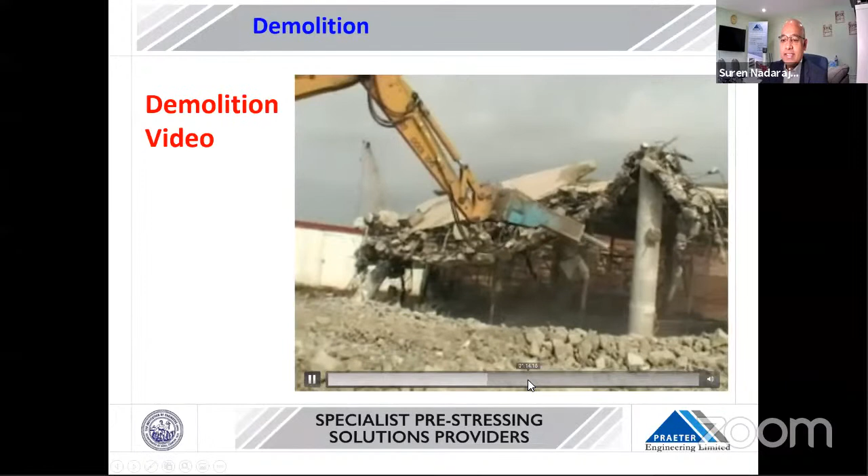One of the aspects we need to consider when we build a structure is demolition as well. Post-tensioned pre-stressed concrete is not much different to RC. A test was done, you can see how it is - not really much difference between RC or PT. You can see the ducts are hanging, so demolition is not really significantly different compared to RC or PT.

So now, just quickly wrapping up that procedure so far. What we have done is the installation sequence: formwork is erected, then you install the bottom reinforcement and edge rebars and any trimmer bars for the penetrations at the bottom. Then the tendons are installed, and after that a top reinforcement is installed on top of it, including the punching shear studs and any cladding channels required. Then after that you do the inspection and concrete. This is a highly process-driven sequence to be followed, and this is what we do on the operation.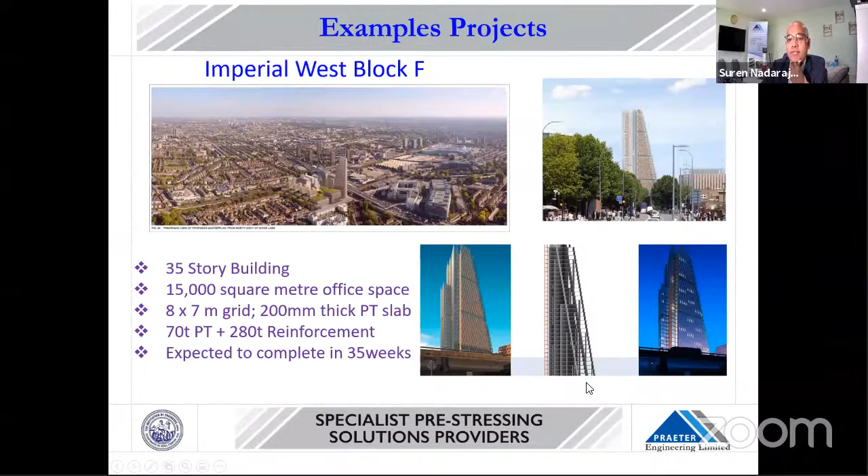There is an accommodation building, a 35-story tower in a slightly different shape. This is the tendon layout for a typical floor, and this is how it's constructed. This is a wall - if you look at it, the load is carried by a shear wall at an angle, transferring the load from here to there. This is the screen, which is edge protection, connected and jumping every 2 levels, similar to core jumping - it's very useful. This is the hoist where you move stuff up and down. You can see another view of how the concrete and the PT are cast.

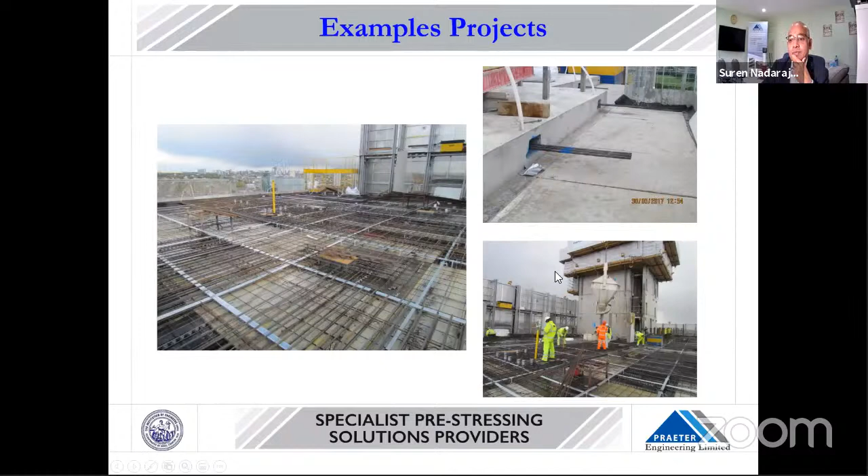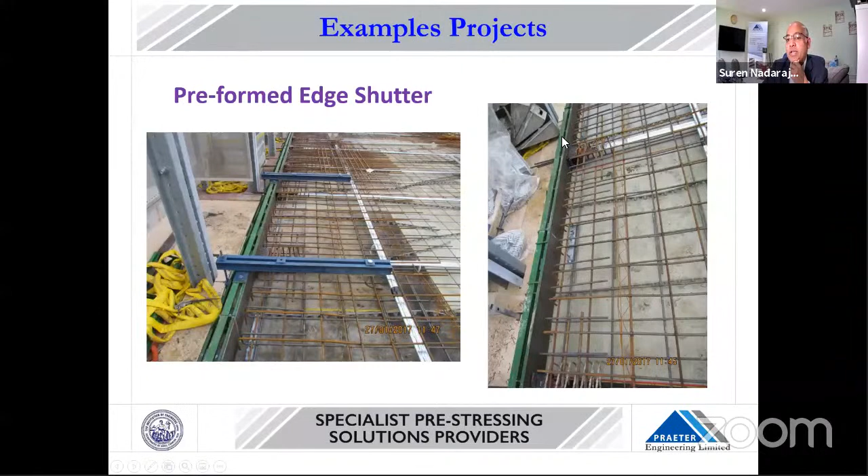And then you can see the core, this is the stressing end where the strand comes out. Again we use precast columns, double height columns. One thing we do nowadays with reinforcement is prefabricate it - like a mesh, we detail it and the manufacturer welds all the bars and brings it as one piece, so we just drop it in. We don't really fix this rebar like a bottom mesh on site. This is again, as I said, the edge shutter which we use for repeatable usage - we try to maintain the tendon locations where holes would be. This is the edge shutter connection - you can see the metallic edge shutter.

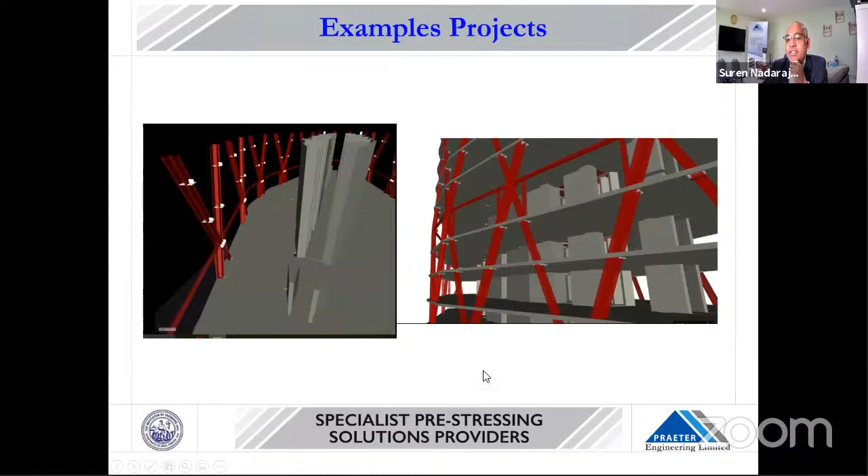This is on top of two underground railway tunnels, so we have plates welded into it. This is the model showing how we designed it, the tendon layout, and how we constructed this - every 4th level we cast first, then the PT floors are inserted into it. Because of the mega frame, we need to cast that, otherwise the stability is not there.

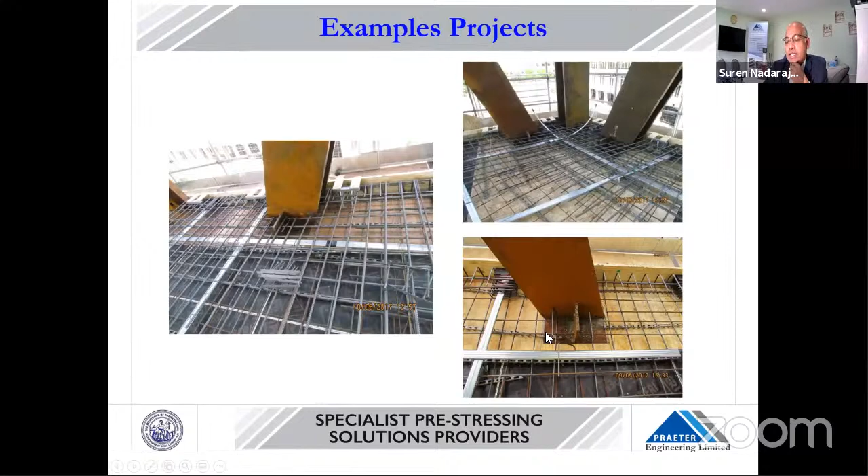You can see this is the tendon layout, and this is another view of it. This is where we use robustness reinforcement passing through the steel column, and this plate provides support for the punching shear. You can see the tower crane ties, and this is the completed project as it is now.

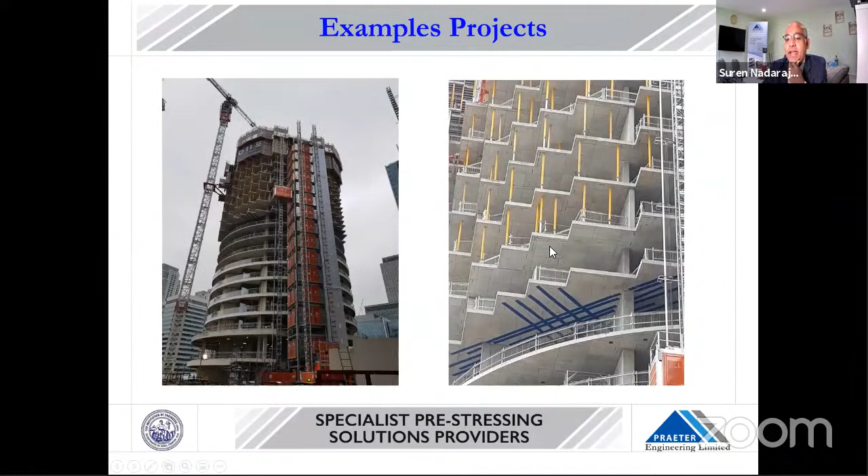This is another 61-story tower called Wood Wharf, again a circular building. You can see this cantilever, all designed by post-tension so that the cantilevers can be supported. This kind of cantilever area, the temporary works is quite important - we need to design it quite correctly, otherwise it may deflect the lowest floor. So it needs to be designed very carefully.

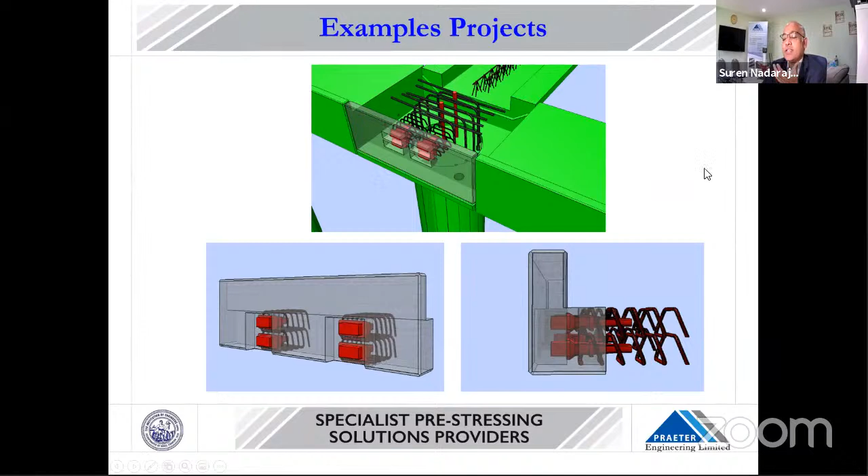Then the Heathrow East car park - this is probably a hybrid solution we used with precast elements with in situ and post-tensioning. This is the model we analyzed originally, all precast. This is precast, the shell beam we used. You can see these shell beams connected, then service holes preformed, anchors connected to the edge slab, column unit.

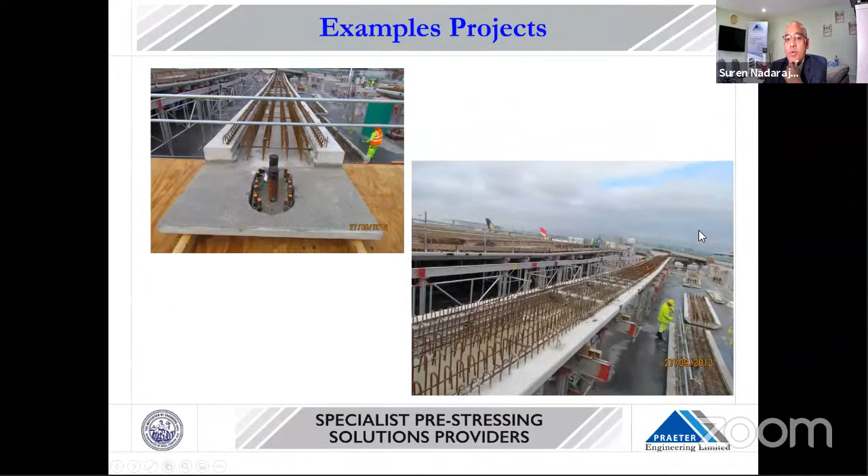This is a mock-up we did to see how the concrete behaves while stressing - that's a column, this is one unit, the shell beam is lowered, then installed all the shell beams. Then this is the edge beam, and this is the precast slab, solid slab. Then the edge one, you can see the angle, this is preformed, then we connected the ducts onto it.

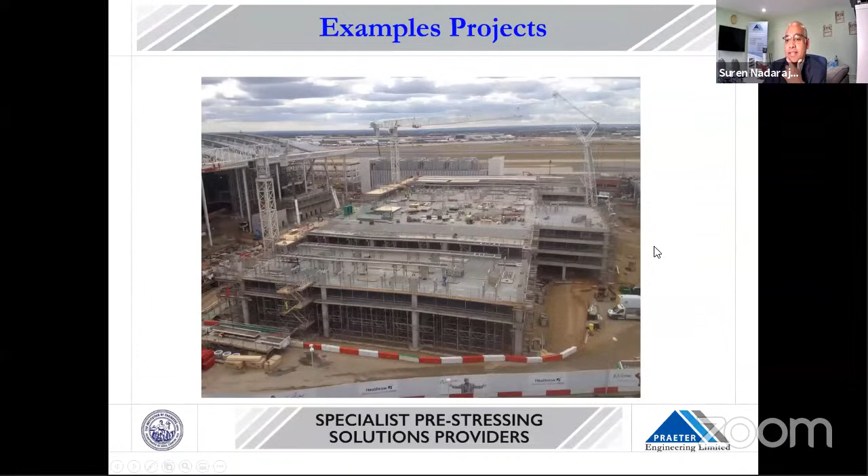This is how it will look like, and at the end it's like this - this is the car park. The completed project is like this - you can see this is very, very high quality.

So next time when you're coming to Heathrow in London, you can go to T2, Terminal 2, and see this massive, beautiful structure. It's like a jigsaw puzzle, like each piece we connected into it.

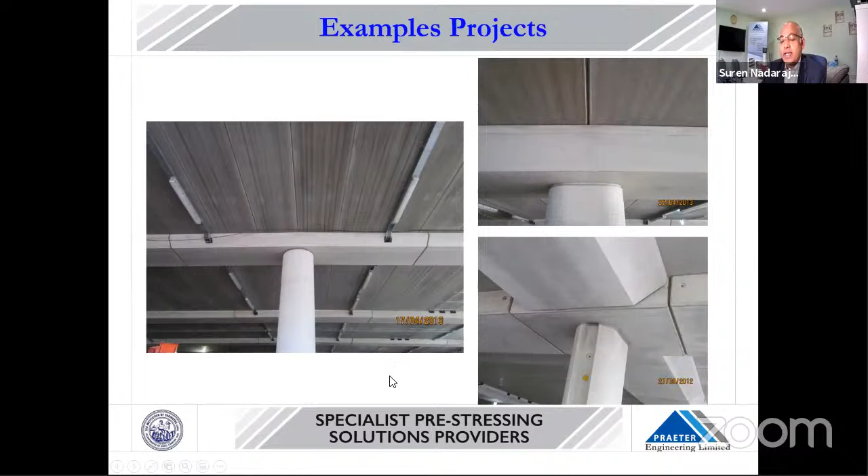Now come to the conclusion, I'll just briefly touch on this. As we looked at, pre-stressing has many benefits, and we can do a lot of impossible things to make possible, like long span beams, many methods on top of tunnels, crossing bridges, and many things by pre-stressing. Its applications vary from buildings to bridges to tanks, special purposes, and everywhere we can do it.

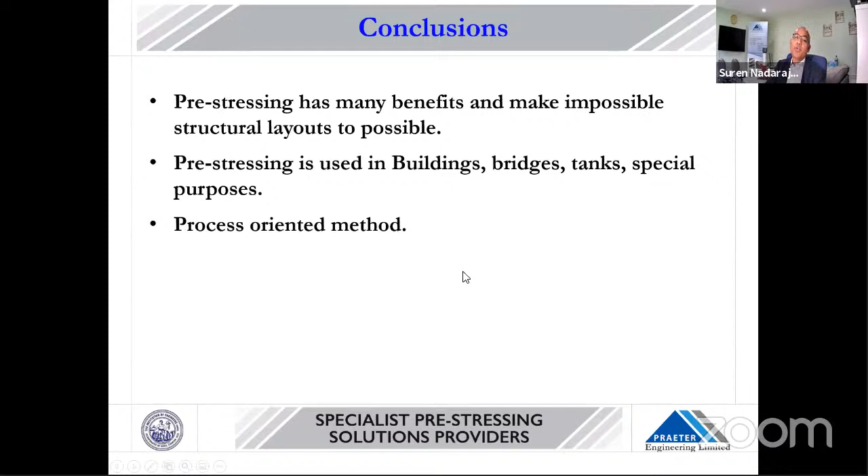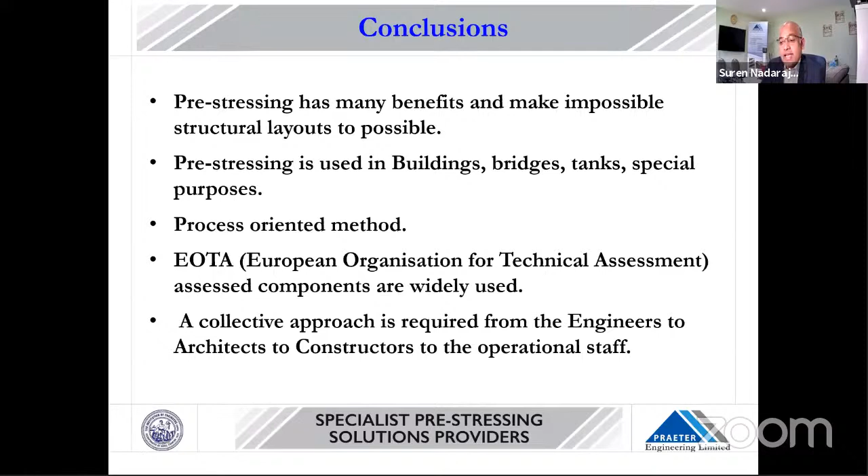It is very, very important - it's a process-oriented method, actually, so we need to follow that. It's really advisable to use EOTA approved components, which will ensure the safety of the product. At the end of the day, a collective approach is required for success - that collective approach should start from the engineers to architects to constructors to the operational staff. Everyone needs to be on board, then only it can be delivered well.

And that's all my little presentation. Hopefully you would get some knowledge about it, and I'm happy to answer any questions you have.

Thank you. It's a really excellent presentation. Oh, thank you very much. I'm an electrical engineer, but still I could follow something on this - the presentation is very nice, it's really good. So it's available on YouTube permanently, so I think people working in this area can view and understand the recent trends in this.